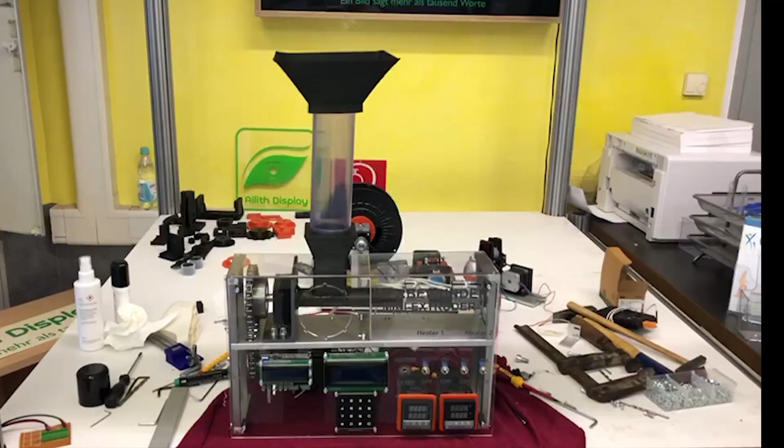My name is Ron and I'm the Betatester of Werbewunder's Desktop Filament Extruder. Today we will build the heart of the extruder and start with the barrel. It's the part where the granulate melts inside the barrel. The heat comes from the heating sleeves and then presses it through the nozzle with a lot of pressure by the screw.

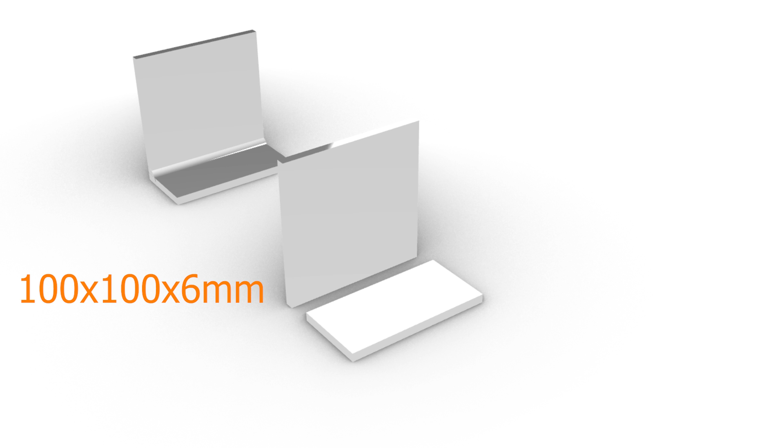So let's get started. First I want to show you with my 3D models which parts you need. The first is a metal bracket. If you don't have one, which I recommend, you can also use two metal plates and weld them together. The bigger plate has dimensions of 100 by 100 millimeters, and the smaller plate is 50 millimeters long and 10 millimeters wide.

The next part is a tube, the barrel in this case. The most important diameter is the inner diameter, which is 20 mm. The outer diameter is 30 mm and the thickness is 5 mm.

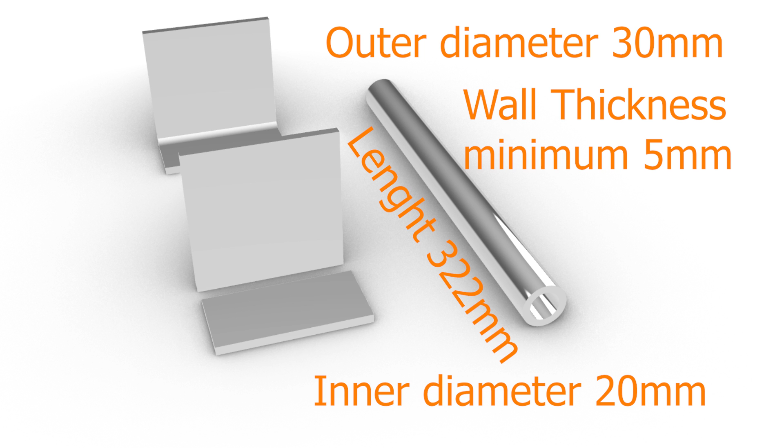What we else need is a smaller plate which comes on top of the tube later, and it holds the funnel. Dimensions are 50 millimeters by 55 millimeters, and the thickness is also 6 millimeters, but that isn't important.

Now let me show you how to bring it together, because it's way easier this way than the other direction. You can start with the L-shaped plate or with two single plates that you weld together. Next you have to make a hole inside, with a diameter of 20 mm.

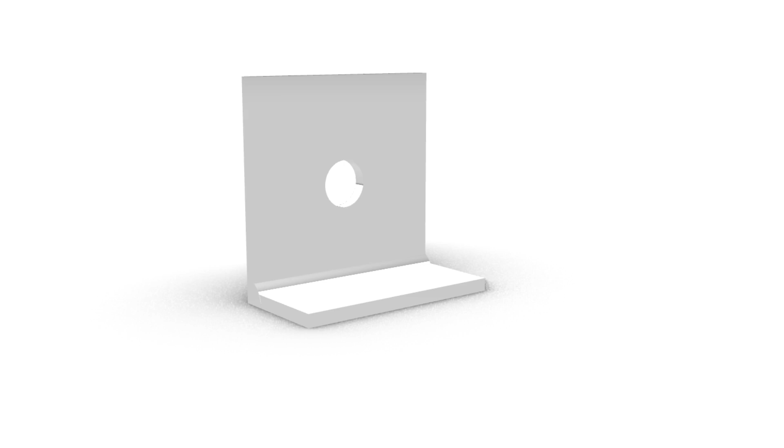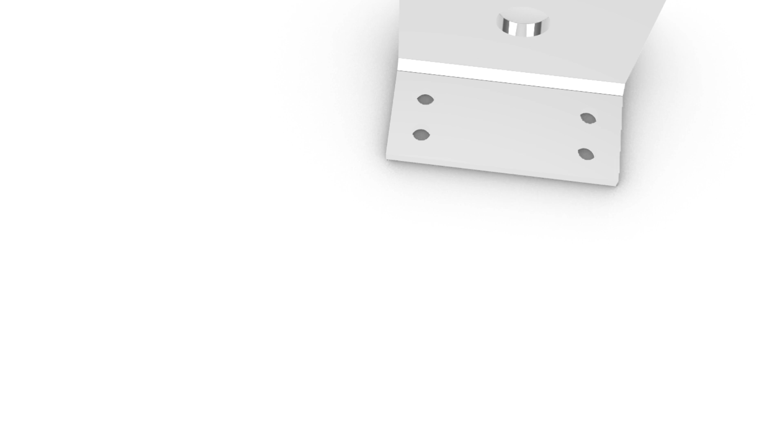Next we need 4 holes, with a dimension of 4 millimeters, an M4. Where you place them isn't so important, a little bit outside is okay because in the middle we will connect the tube later. In my case I have no inner thread in these 4 holes because I will connect it to a metal plate, an aluminum plate, so I don't need it.

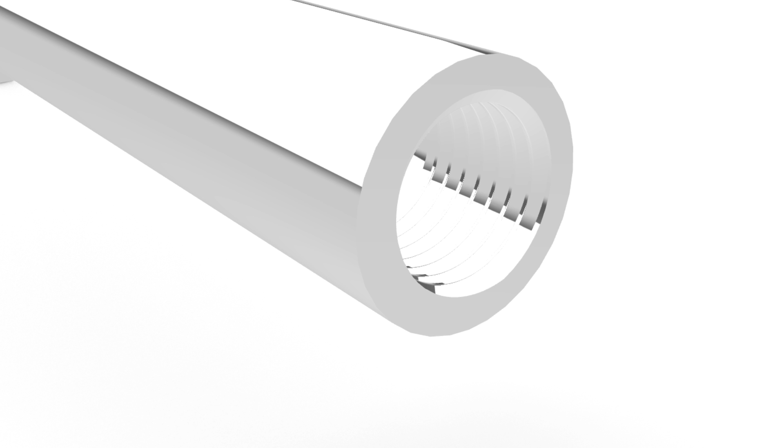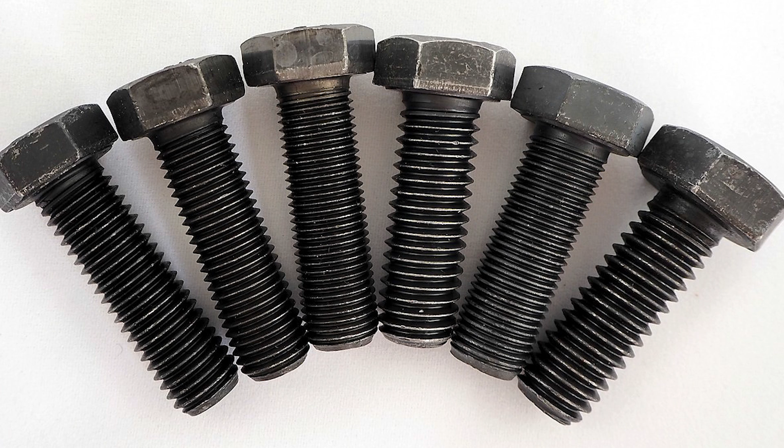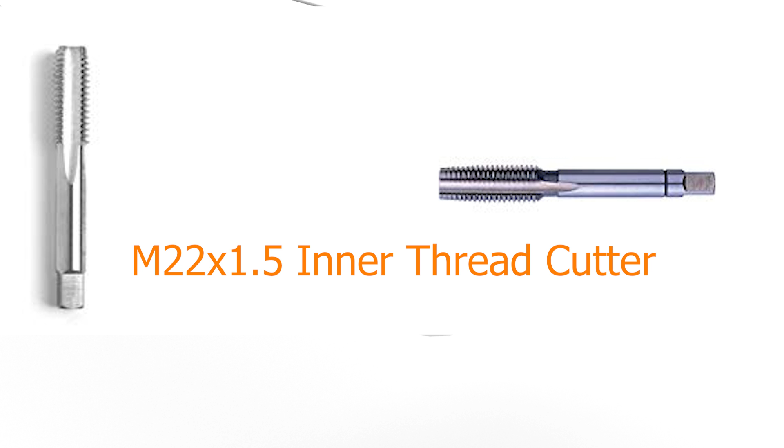Now let's come to the tube. The first thing we have to do is make an inner thread on one end. The inner thread dimensions are 22 by 1.5, so for this we need a fine thread. On this picture from Wikipedia you can see that screws can have very different thread types, so it's important to find the right one. The one we need is an M22 by 1.5 inner thread cutter.

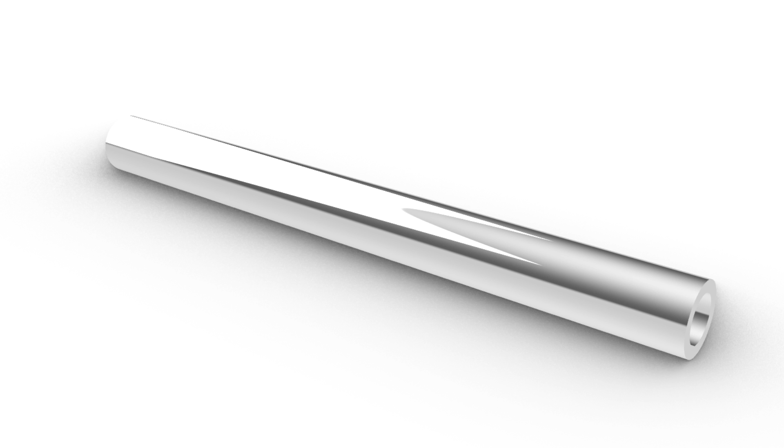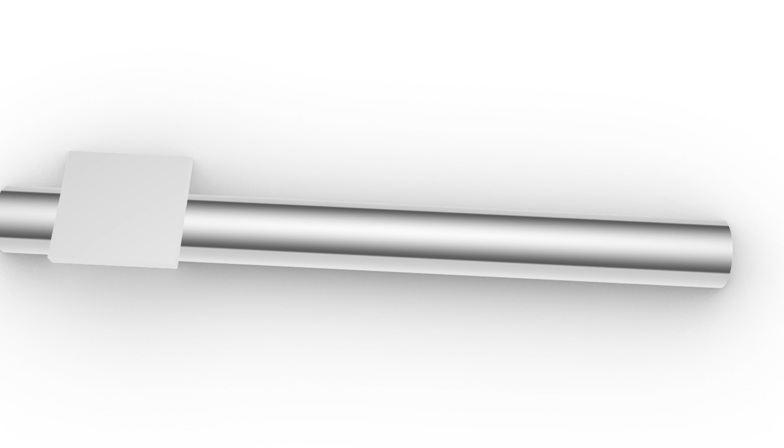Now we bring the smallest plate I showed you in the beginning, 50 by 55 mm, onto the tube and weld it. Before that, I recommend making 4 holes outside on each edge, and it's easier when you make them before welding it on the tube. In my animation it's in the wrong order, but it's possible. I made that mistake myself and recommend not doing it that way. So make the 4 holes before you weld it on the tube.

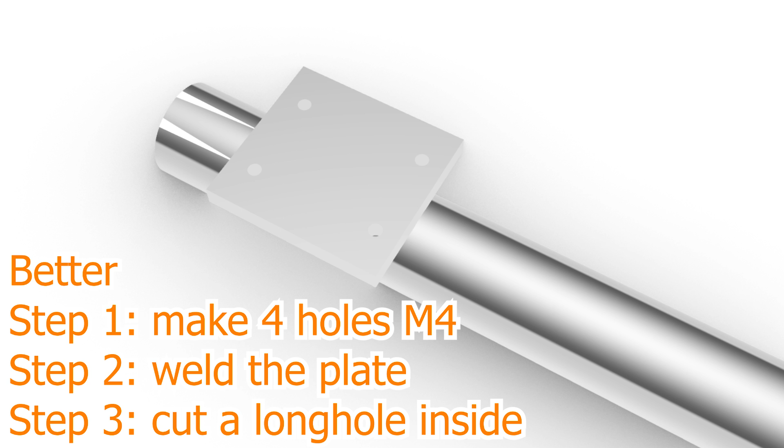The plate you make on the opposite end of the tube from where the thread is. What you see now is where we will bring the L-shaped form on it, and on the right side, what you see now, we have the inner thread.

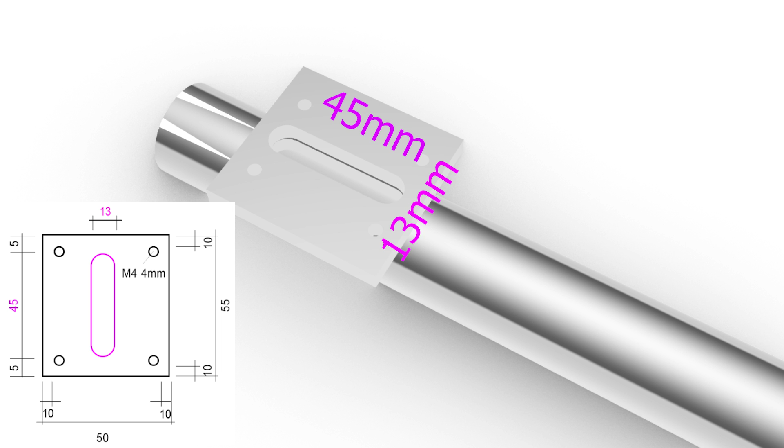Okay, then you make a long hole, as we call it in Germany. The point is you need a 13 millimeter drill, and you make side by side several holes with the 13mm drill till you reach a distance of 45 mm. Then you cut it out so it looks like here. If you have a lathe, it should be way easier, but it works even if you don't have one.

Now the last part is to connect the tube, not where the inner thread is, but from the opposite side, to the L-shaped metal plate.

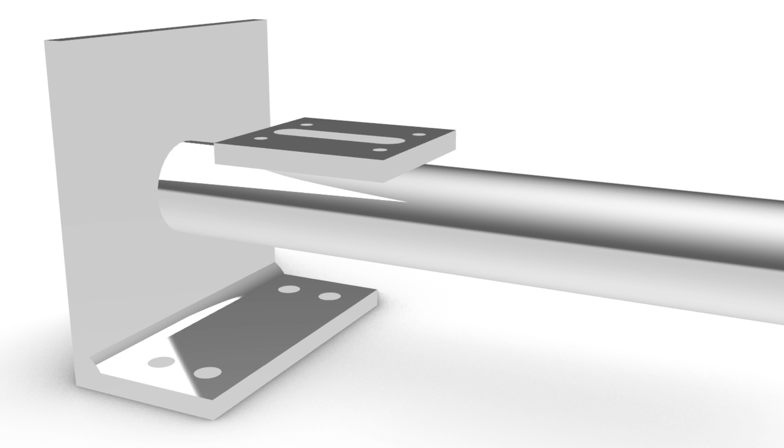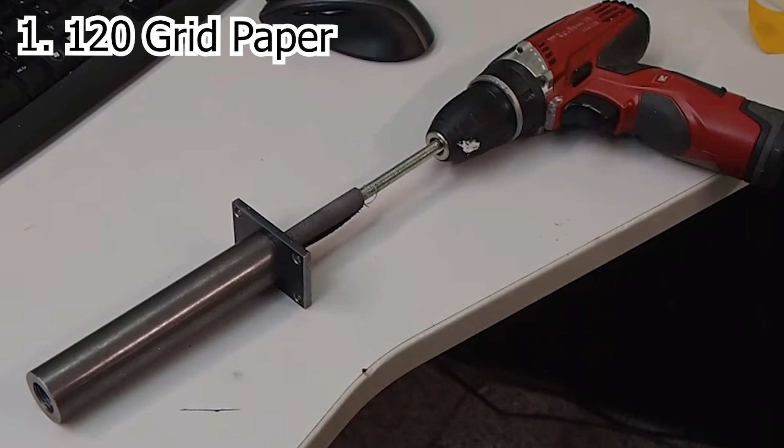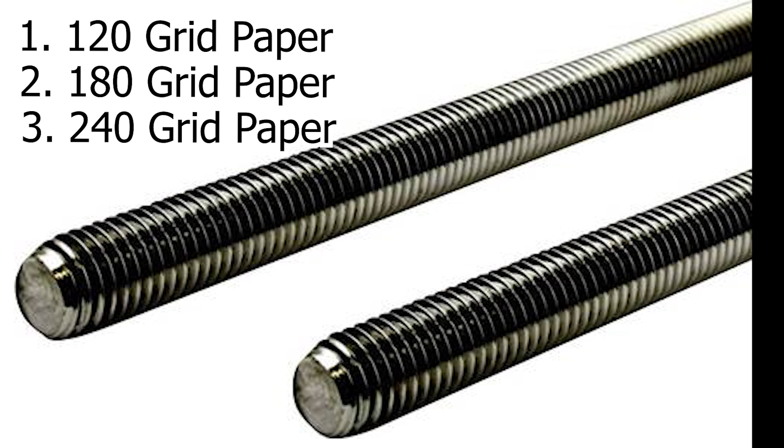Now you come to the fun part. You have to work on the inside of the tube with 120 grit paper till it's smooth, then move to 180 grit paper, then 240 grit paper, and then 320 grit paper. The easiest way is to use a cordless screwdriver, and use a rod or a threaded rod as you like.

I had only a threaded rod, so I connected the grit paper to the rod with tape, then wrapped it around and smoothed everything as much as possible. The more work you put in, the better the results will be later, and the less the filament screw has to do.

So the more effort you put into making it as smooth as you can, the better results you get later. Use a little oil on the sandpaper, it helps a lot, and once you've done that, you're really done. Now let me show you how my result looks.

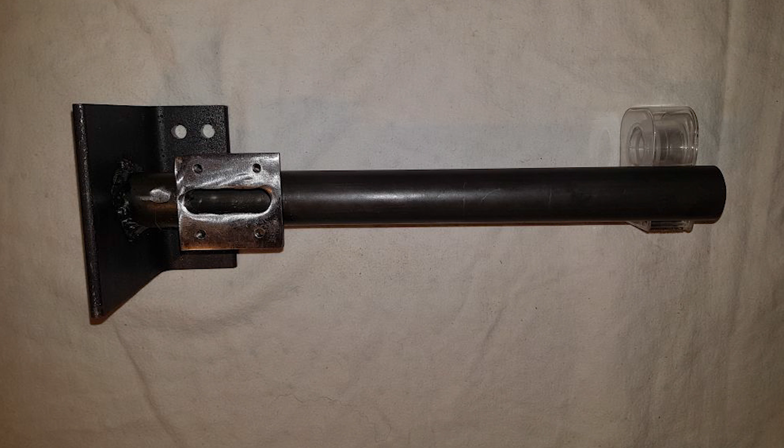So this is my barrel. I made it in a metal workshop. I showed them my sketch and asked if they could do it for me.

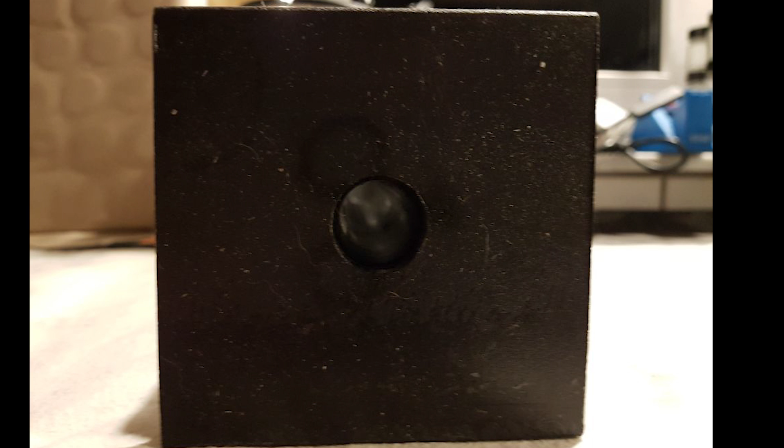They asked if I wanted to do it myself because they had no time. I said yes. They showed me how to weld, how to cut, they showed me everything, but filming was not allowed.

I can tell you, I paid 35 euros for it. I gave them 40 because I was so thankful to learn everything from them. But it has a disadvantage.

My barrel doesn't look very professional. I had never welded before, and I had never used such machines before, but I really can recommend that to everyone.

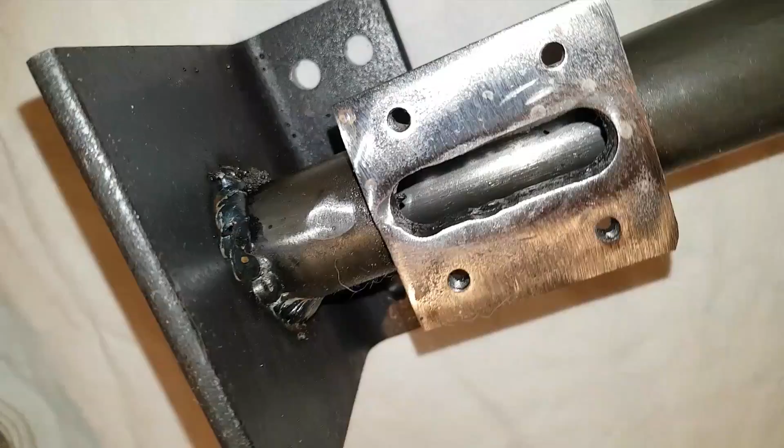Ask if you can do it yourself. Get the experience, it's really awesome, and you'll be more proud of the end result than if they did it for you. Now let me say one thing about the steel for the tube.

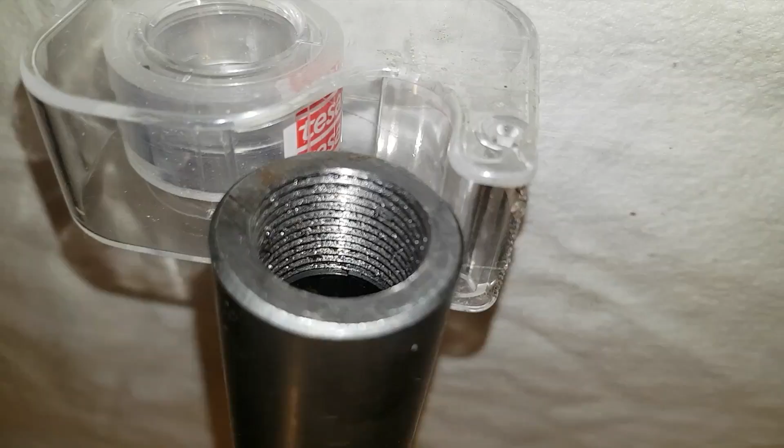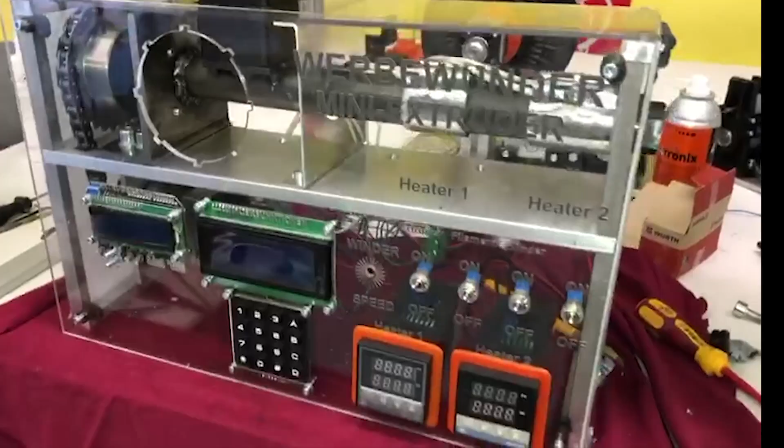The tube will have a lot of pressure inside later, because the screw always tries to push the granulate to the nozzle, and that creates a lot of pressure. So try to get the hardest steel for the tube you can get, really, the hardest steel, okay?

Now let's see how Werbewunder is doing the barrel in his workshop. Before you wonder why he starts in this order, let me tell you Werbewunder told me to show you the best order to start in. He is very experienced and has a different sequence, and if he makes mistakes, he knows how to fix them, so the order shown here is the best one.

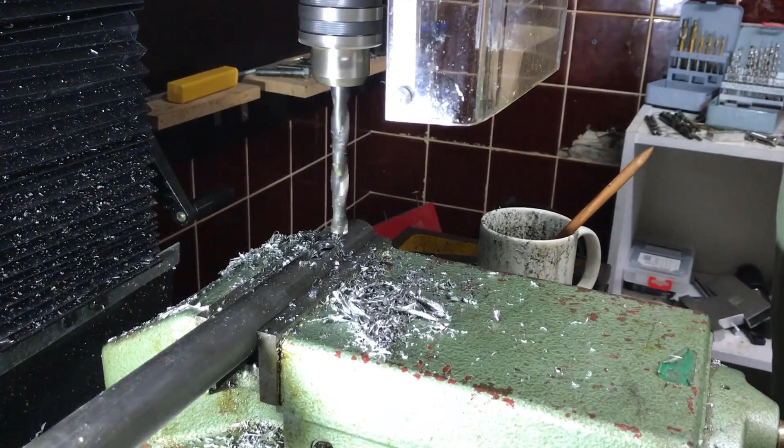Let's look at how he is doing the individual parts. Here you can see he is using the drill, making several holes side by side to create one long hole. It's very important to always use a lot of oil for the drill, otherwise it will break or overheat. The drill size, by the way, is 13 millimeters.

I did the same after drilling the holes, but I used a grinding machine or polisher instead. The results you saw weren't as smooth as his, but it worked, and after I showed him the pictures, he said it was totally okay.

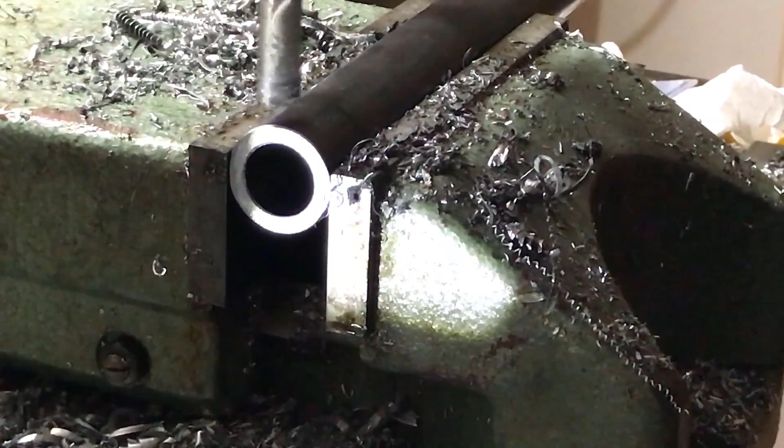Now he's doing a step I had forgotten. He makes an edge for the wrench, so later you can get the nozzle off and on more easily. This means he uses two wrenches, one holding the nozzle and one holding the barrel, which makes it much easier to get the nozzle off and on.

I have to do it myself later, these days, I don't know exactly when, but it's very helpful. Otherwise you'd have to use pliers.

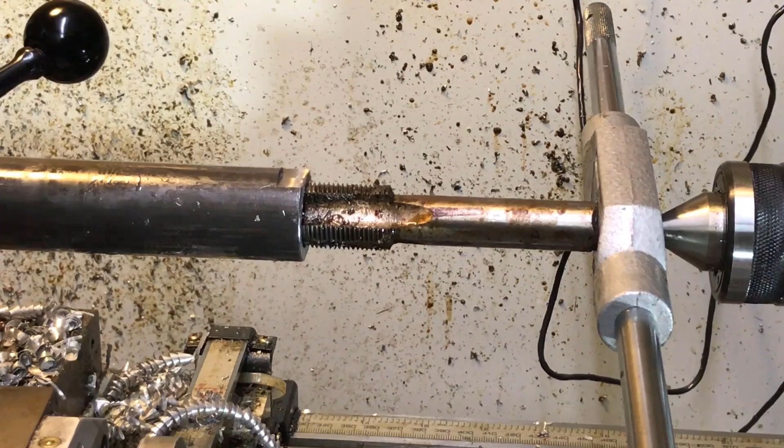Now we come to the inner thread. That is, as I told you, M22 by 1.5.

Now he tests if the nozzle will fit later or not, and if it fits, then it's ready on this side.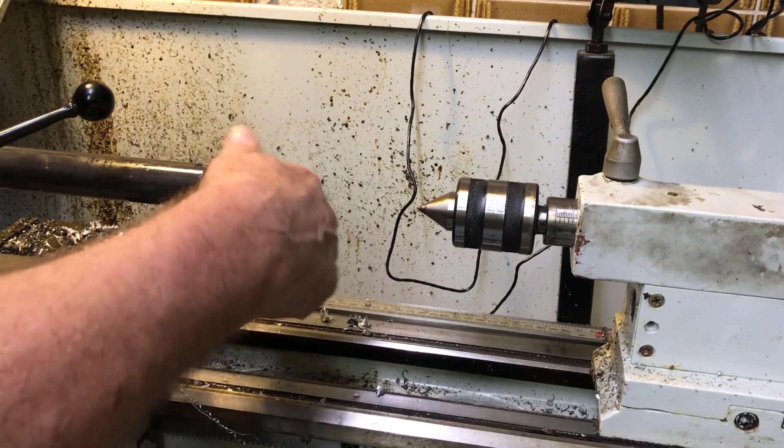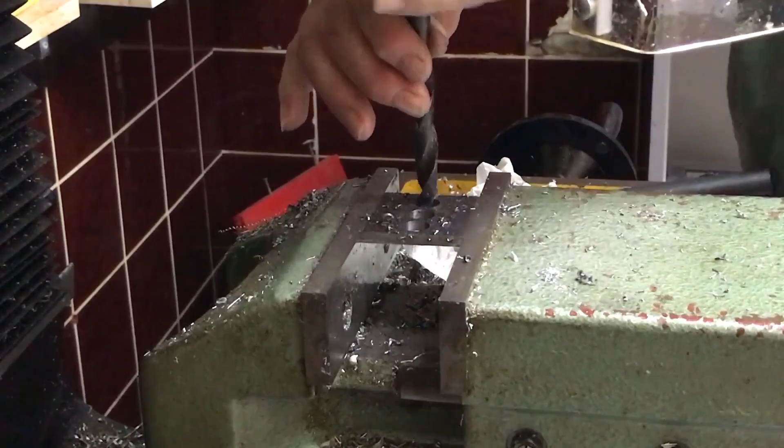Now we come to the small plate part. Here he first drills holes inside and turns them into a long hole, but as he told me, he welds it first onto the tube and then does everything at once.

So now he makes the four holes which I showed you before. They are M4.

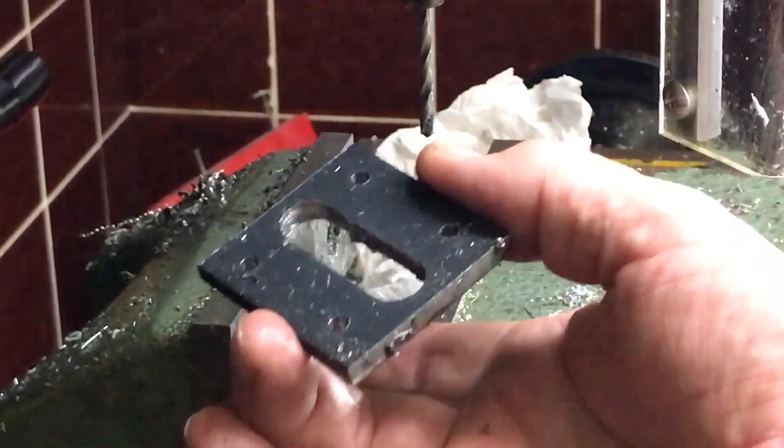Now he makes the inner thread for the M4 holes, and after that he starts to weld everything together.

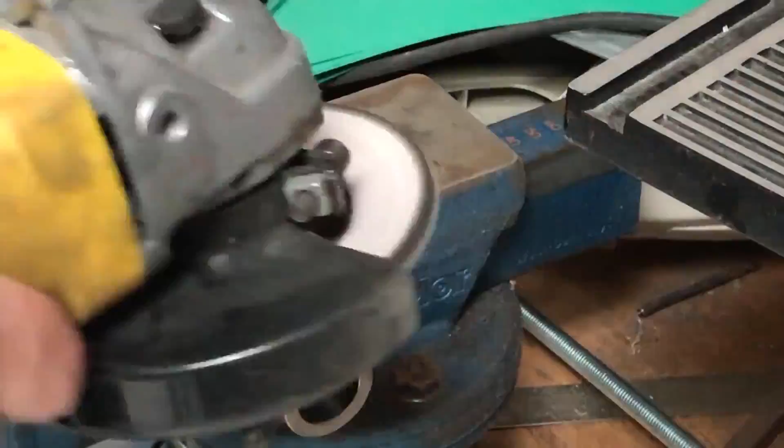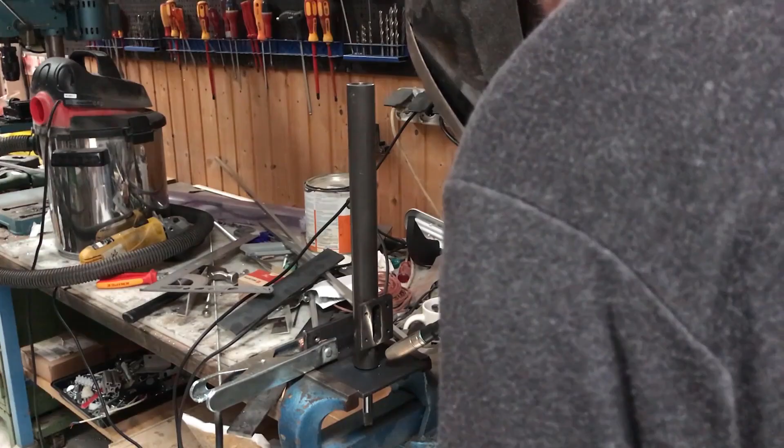Now he welds the L-shaped metal to the tube. It's important that the L-shaped metal is at 90 degrees to the barrel in all directions, so that the screw can turn into the barrel easily and the barrel stays horizontal to the ground.

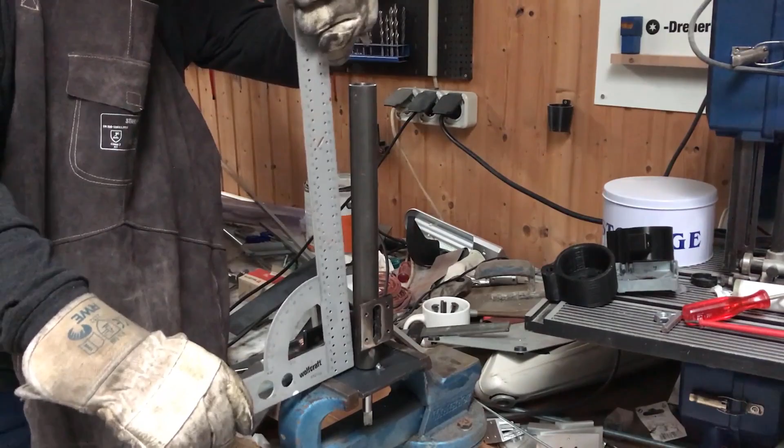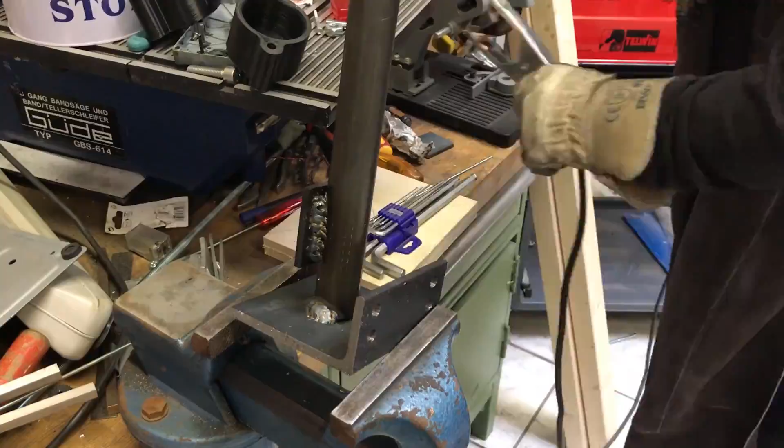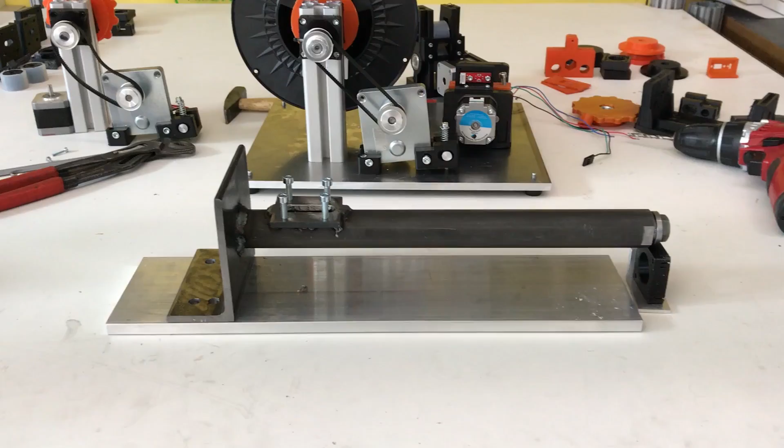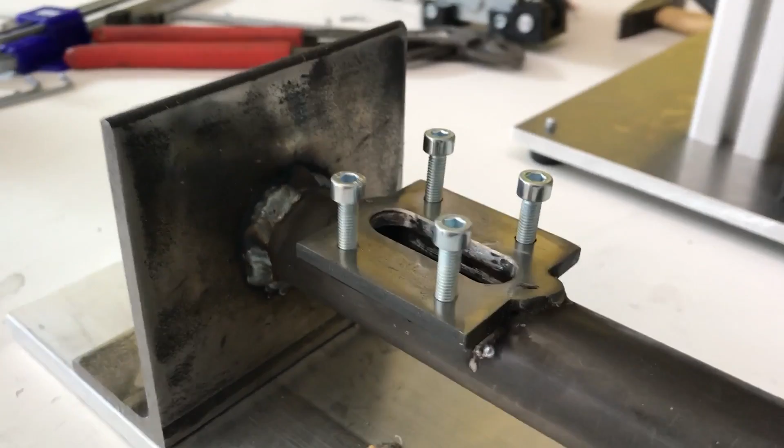And that's it. Guys, I have one question for you. I'm personally very interested in a really serious CNC machine, I mean not one that's shaky or cheaply built, I mean really serious.

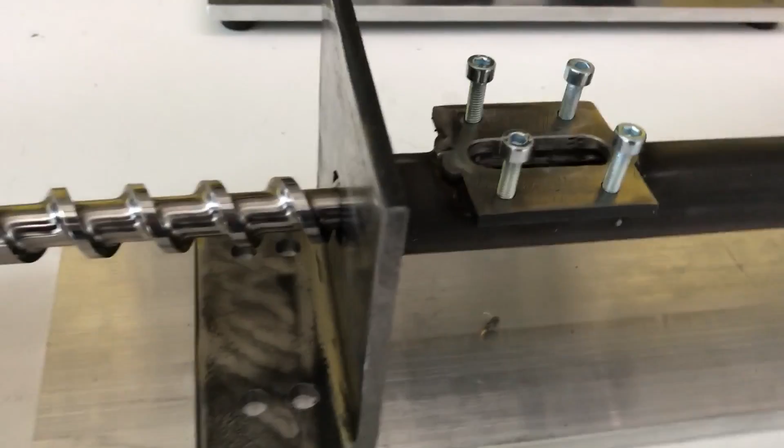Werbewunder told me it is only possible to make one like this if you spend around 1000 euros, and what you get out is comparable to a 5000 euro CNC machine you could buy, meaning there are near no tolerances. I would really love to see how he does it and to rebuild it, but it makes no sense if it's only for me.